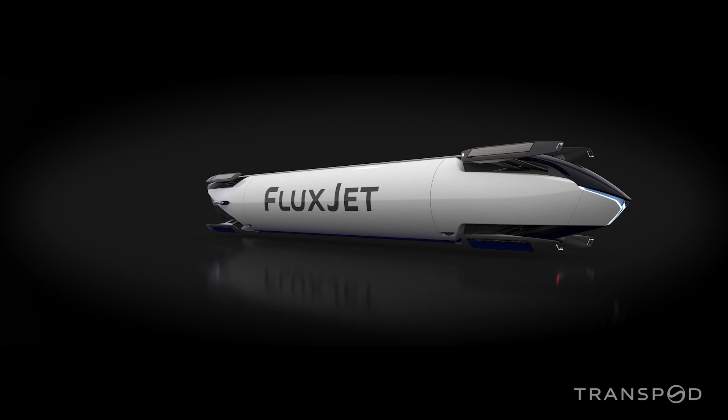The FluxJet is different from an aircraft, and it's different from a train. It's a whole new type of vehicle, a new category. This is a vehicle to carry passengers between cities at over 1,000 kilometers per hour, and cargo and freight. But it operates slightly like a train, and it's built like an aircraft. So here is the basic idea.

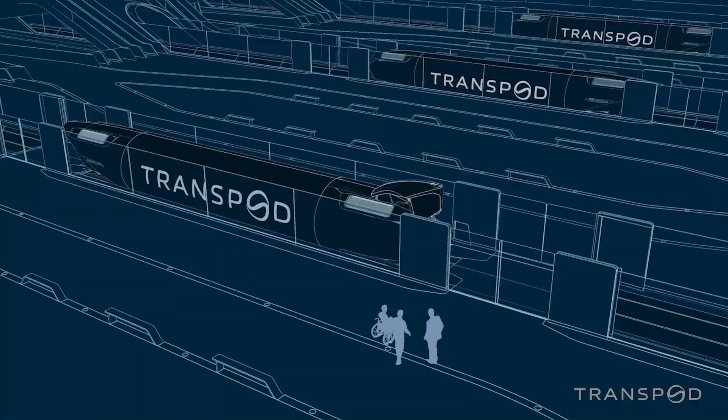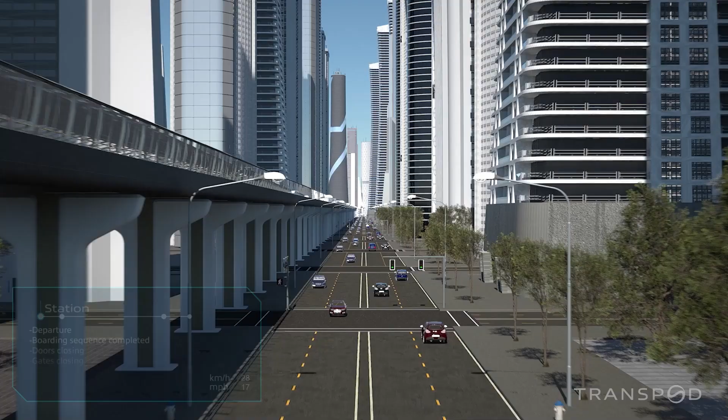This is what we call a FluxJet line. Traveling along this line will be a little bit like going in a subway or a high-speed train, but much faster. I'll talk about the construction plan of that later.

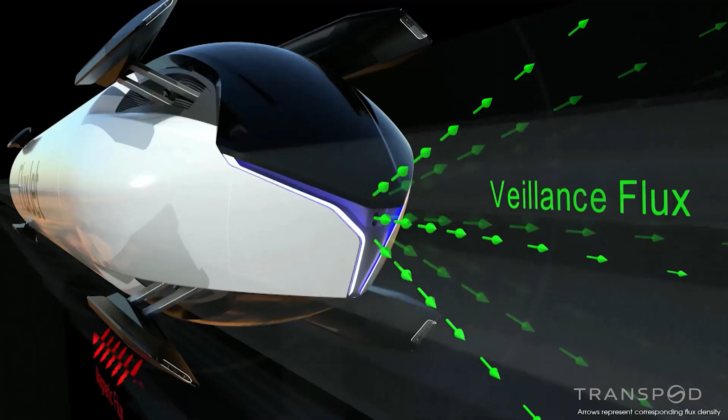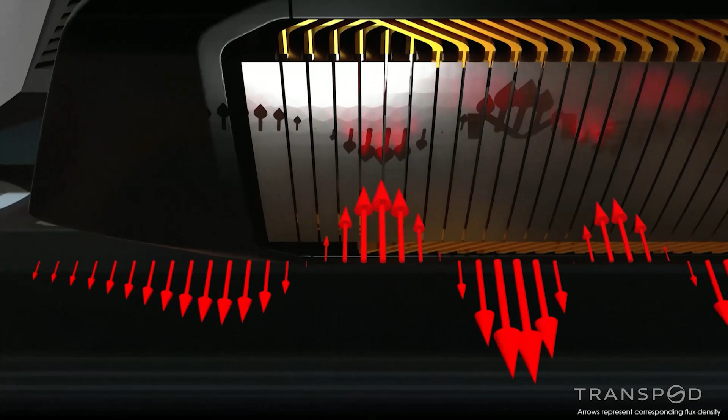But okay, wait, why is it called a FluxJet? Well, we're bringing together three innovations. These are major innovations. We're actually bringing together three different kinds of flux. The first here is called Veillance flux, that's to safely guide this vehicle at high speed. The second is magnetic flux, and that's actually to levitate the FluxJet and push it forward. Now the third flux, in blue, is electric flux, and that's to get power onto the vehicle.

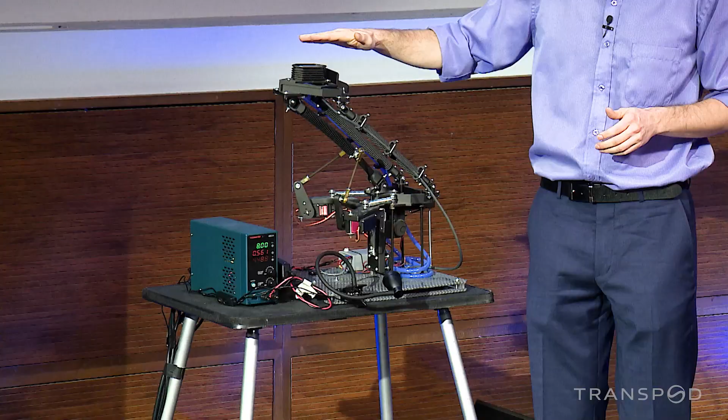All three of those types of flux are with no contact, kind of like this. Because friction is the enemy of speed. And so everything about the FluxJet is designed to avoid friction. So those three things, electric flux, magnetic, and Veillance flux, working together, and that is a first.

Electric, magnetic, Veillance. EMV. The world's first EMV FluxJet. FluxJet for short.

So let's just take a quick tour of those three fluxes, and this is really beautiful. Of the three different fluxes, the first one is electric flux. And what's exciting about that is that we're using plasma to get power onto the vehicle. What the heck is plasma?

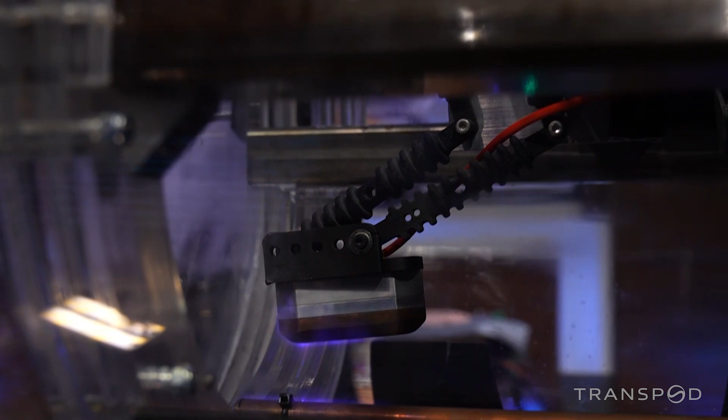So this is just a very small model, and it's chopped up, just a little thing to show you. And they're just dimming the lights. You can actually see plasma here. So right now it's getting power onto the vehicle, see these lights here? And we have the voltage display somewhere. So it's getting power onto the vehicle right now.

The power is coming from the grid onto the vehicle, so it's a circuit. The current goes onto these power rails, goes through that gap, not touching, going through that first bit of plasma there. It's going into the vehicle's systems, powering things up, going out the other side with this other gap of plasma, and then back again. That makes a circuit, but a circuit without wires, at least in those gaps.

So the wires go here, but then the rest of the circuit here is without wires. That is a groundbreaking new innovation for part of this to make it go at high speed. You can actually see that at high speed in real life over here.

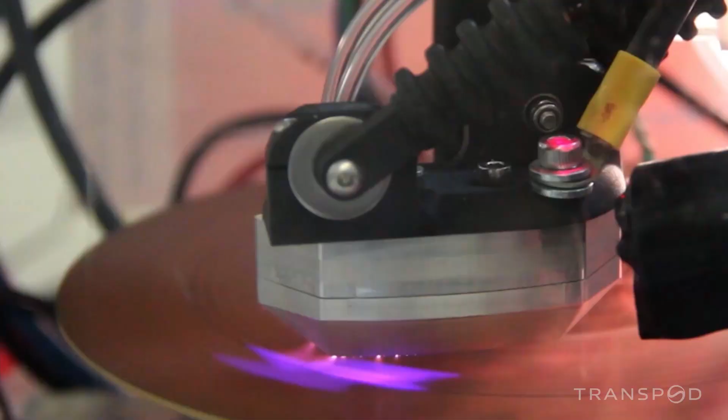This is from actually 4 years ago, one of the high-speed tests we were doing, recreating the conditions of a NASA experimental aircraft, high speed, high voltage. We proved this 4 years ago, and the technology has come a long way since then. We've been working with research labs, and we're just starting another project with CERN, the particle accelerator in Europe, with that whole team. You can actually see that on the FluxJet vehicle too.

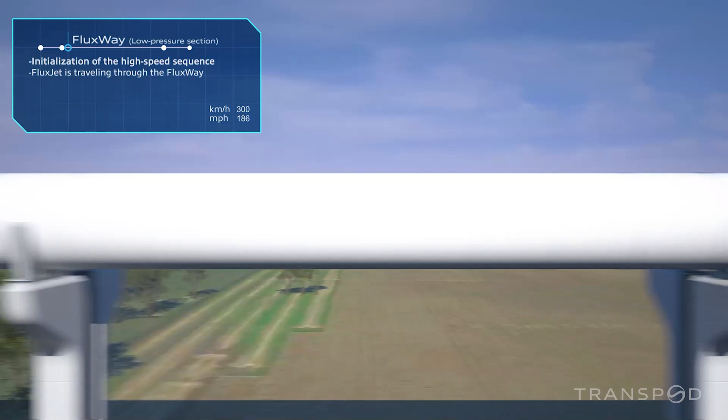Let's take a look. Here's the FluxJet, going along there. It already has auxiliary power, secondary power. Once it gets up to a certain medium speed, you see that special technology deploying, that power pickup, and now we see the plasma there. It's getting power from the grid onto the FluxJet, and now it can start accelerating up to that very high speed. So we're taking forces in nature and we're harnessing them.

Now we have the energy on the vehicle. How do we use that? We're going to use that energy to push the vehicle forward, to propel it forward, and actually levitate it off the bottom, to remove friction. So the second of the fluxes is what it's using, and that is magnetic flux.

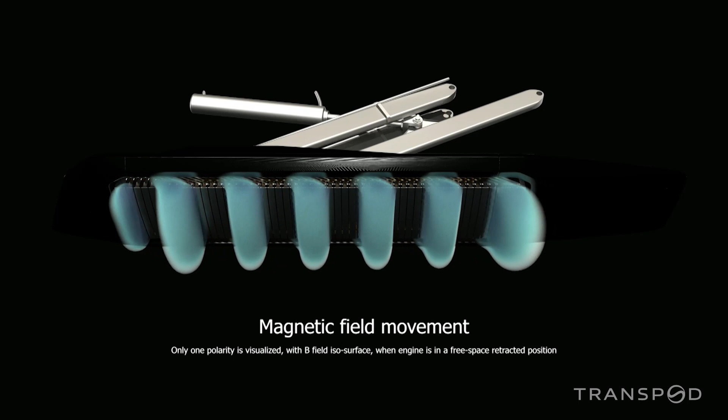Now on the vehicle, the FluxJet, there are some fancy engines. How do they work? Well, they work by creating that wave. They make a wave, and that wave is a tiny magnetic field, just a small wave that's moving along, but at high speed. With that moving wave, it can levitate the vehicle and push it forward. So we're actually controlling and sculpting that wave, and that moves the vehicle.

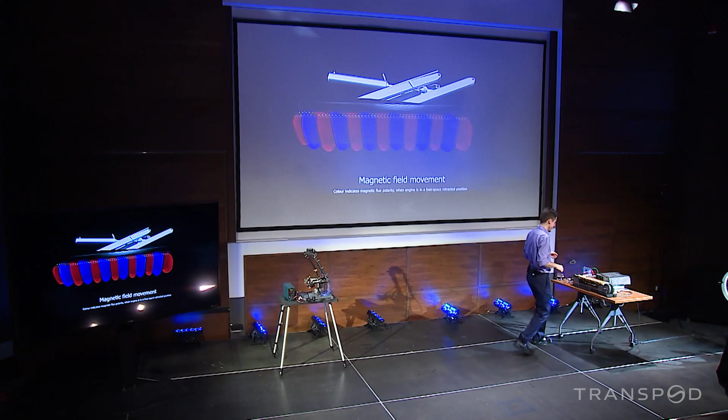You can actually see that over here. This is just a really stripped down, simple version, just to show you the concept. My hand feels nothing, but I can still start to feel this vibrate. Let's try an experiment - I'm going to not push it at all, just drop it like this. Whoa, so it just goes along like that. This is a very crude way of showing it, a very crude, kind of simple toy, very shrunken down version, but that's the basic idea, ultra simplified. That's the magnetic wave.

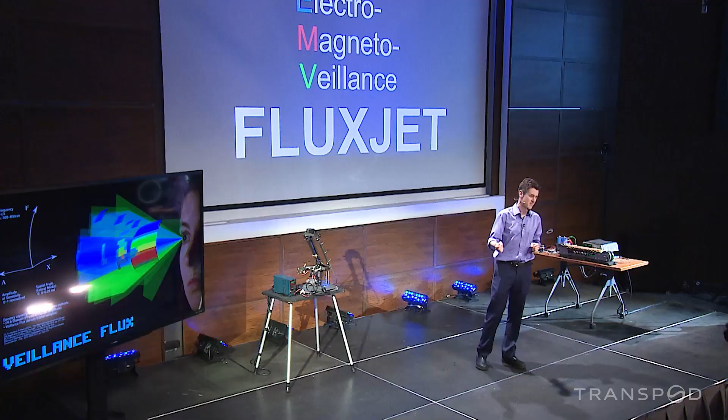Now the third type of flux, getting to the third one, is called veillance flux. So we're just putting these three things together.

Sensing, and seeing, sight. Sensing of sensing itself - it's kind of meta.

We have some secret sauce for the world's first predictive suspension system. Predictive suspension.

Think of your car - in your car, you have a suspension, right? That keeps the car going smoothly while you're driving along, and usually that's a passive suspension. There's this new thing called an active suspension too, but this is the world's first patent on a predictive suspension. That's ultra critical - when you're going at over 1,000 kilometers per hour, that predictive suspension is needed. It's essential, and now we have that.

So to sum up, veillance flux is for safety and for a smooth ride for the passengers. That's the FluxJet - veillance flux, magnetic flux, and electric flux. We've spent the last 5 years developing, researching, and testing this technology, and it all goes to make this new type of vehicle, the FluxJet. Think of green transportation - that's the key here.

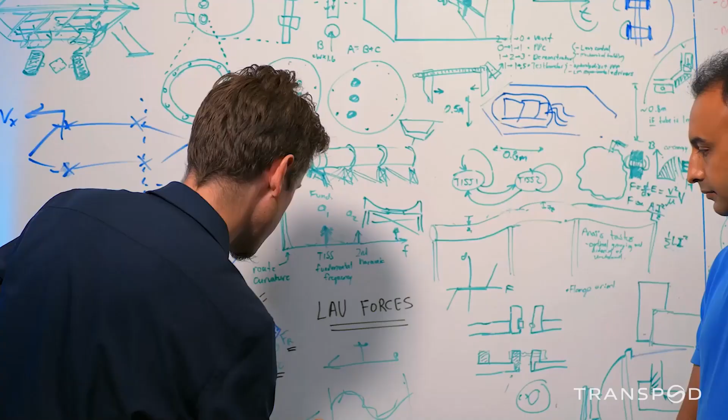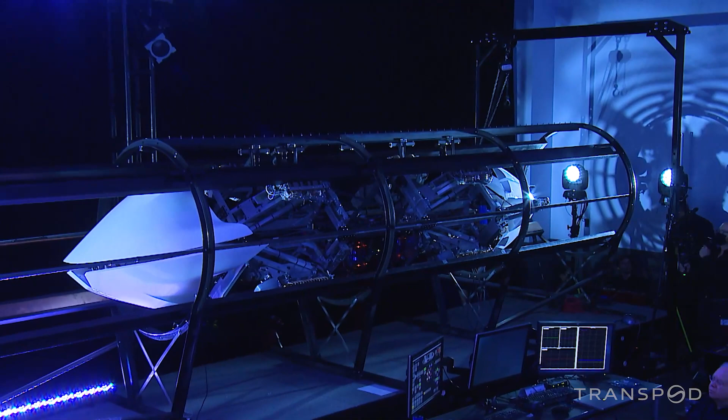So, let's see the FluxJet. Ladies and gentlemen, a baby FluxJet.

This here is about a quarter scale model of the full FluxJet. This thing is an amazing piece of technology. It actually has 8 engines on it, 4 on the top, 4 on the bottom. You see one of them here, one of them here. The 4 on the top are for guidance and levitation. The 4 on the bottom are for propulsion, pushing it along and making that wave motion.

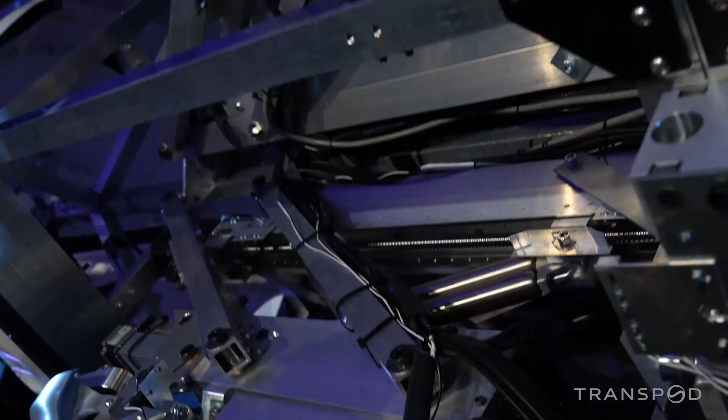All of those engines are extending out, robotically kept in place like that, held in place kind of like this, all interacting with the guideway, which keeps the vehicle under control. It can actually roll and bank into a curve, like when you're flying on a jet and they bank the aircraft. They all work a little bit like an octopus—think of it like an octopus with 8 tentacles, all of those engines working together.

This thing actually has 11 computers right now, 11 brains working together. 8 of those brains are for the 8 engines, and you can take each of those engines—they can work together or independently. It's very real-time, high-speed control. Of the 11 brains, 2 more are for communication and guidance, and then there's 1 brain to command and control all of the other brains—1 brain to rule them all.

This has a liquid circulatory system going through it, like liquid coursing through the veins in your body, cooling the different systems.

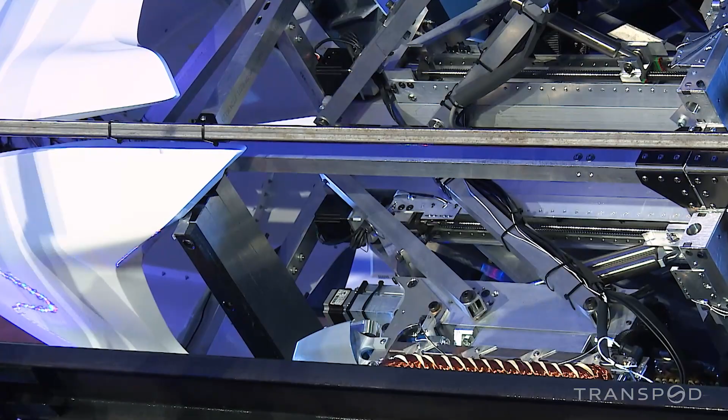Now, this one demonstrator—we were running this at a different site, and we basically picked the whole thing up and plunked it down here just so you can actually see and come up and touch it. This is a very rare opportunity to do it while it's out of service. They often talk about the yellow line, stand back from the yellow line—so today, there is no yellow line. We've stripped things away so you can actually walk up to this and touch it after.

Right now, it's operating for safety, in levitation-only mode. So let's try the levitation-only mode and get that started. What's happening here is it actually has magnetic gaps. So what I'm going to do—there we go. I'm actually going to get up here so you can see. Now let's just look at those gaps. I can stick this piece of paper in here, and let's just get that there. There we go, okay, so there's a gap there—no contact. It's controlling in real time and lifting this 1 ton of weight.

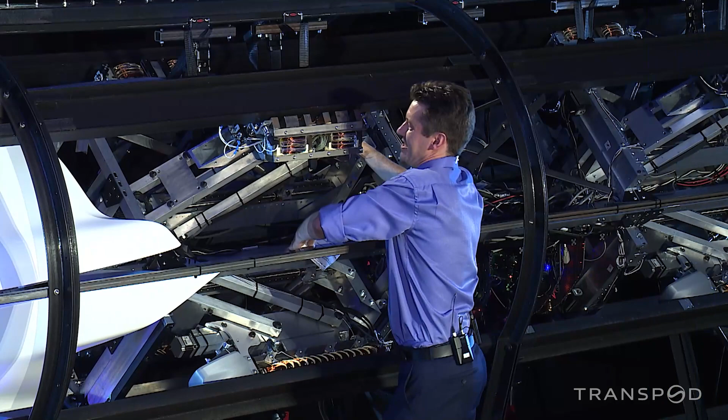The whole thing weighs 1 ton. It's like lifting up your car on a very smooth cushion of magnetic waves. You see how it's stabilizing itself. At high speed, we need that stabilization, all working in real time to just guide it smoothly.

Let's also see the computer vision. So right now, if they can bring that up on the screen. Oh yeah, there we go.

Okay, so if I wave this, it's covered in sensors all over. I'm just waving hello at the front of there. Okay, this is the front, that's the back. So this is just one of the sensors.

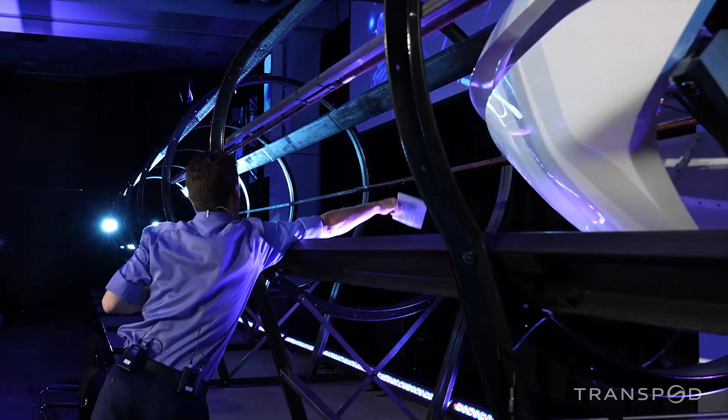See all the computer vision, so it's tracking the guideway in real time. And the whole thing is covered in sensors, so at last count it was about 230 sensors just on this thing.

Compare that to the full FluxJet vehicle. It's incredible the amount of control and communication that's going on.

Speaking of that, I sometimes talk about it like a set of Russian dolls. So you have the small one, and right now we're also working on a half-scale test facility that we've got the construction permit for in France. That's going to be next year. Meanwhile, we're working on the full-scale test track, which you'll hear about in a moment, in Alberta, Canada. So all of this is being developed by us and our partners at the same time.

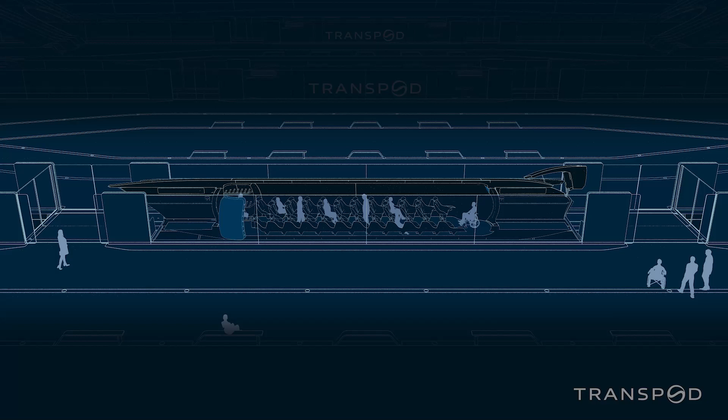So, okay, what about the passengers? When Boeing and Airbus build a new jet, they always design it to be reconfigurable, so every different airline has their own preference for how the seats are laid out. They all make their different forms. And so that one's old.

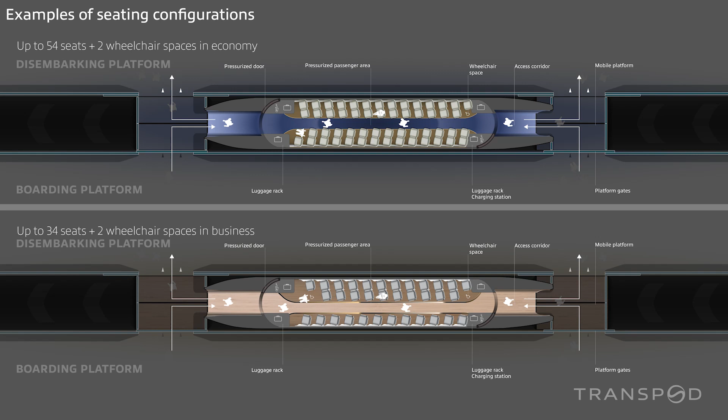A little bit newer is two of our versions, where we have the economy version and the business class version, different versions of the interior. The economy class version has 54 seats and the business class 34 seats.

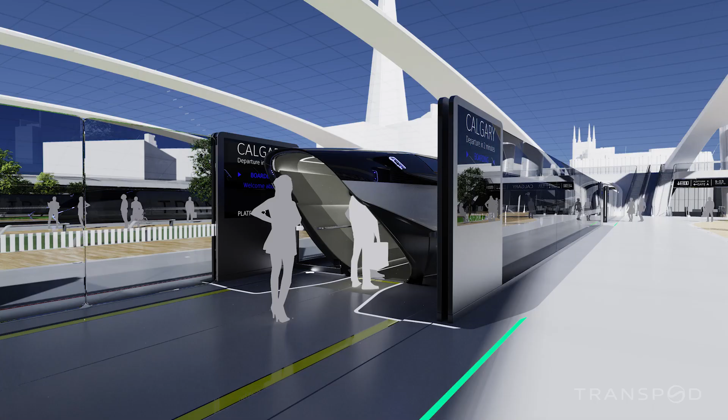One of the amazing things here is we have a special design to make this fully accessible. So this is a fully accessible vehicle, the FluxJet. Think of people who are in a wheelchair. With this fully accessible vehicle, that's part of the passenger experience that we've been designing.

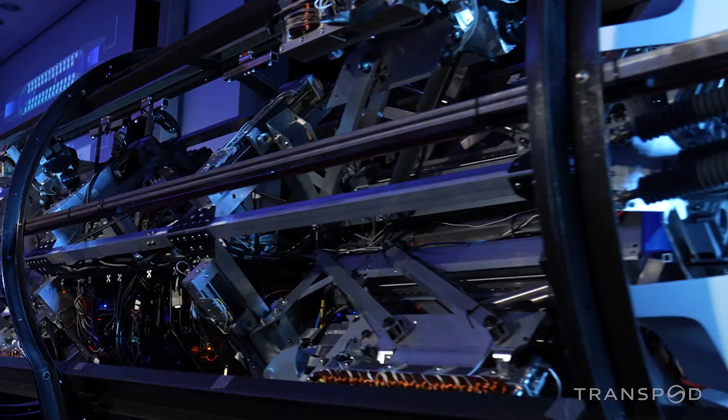So that's a first. The whole line is called a FluxJet line, and it's not only the vehicle, but also the infrastructure. We've been working with construction partners and civil engineering firms, architecture on all this, the infrastructure design, station design. This is being designed for different countries, different cities around the world.

I'm going to give just one example of a location, and that is in Alberta, Canada. That's the test track, the second test track for the full regulation I mentioned, where we're going to have regulators from Europe coming, which we're already working with, to inspect that line for the final certification, and of course Canada and the US. That's going to be in Alberta, so let's see some of what's coming up in Alberta.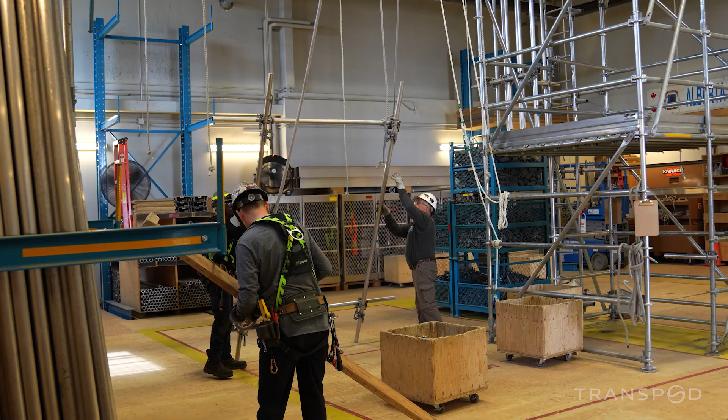The FluxJet is an exciting, major project that will put a global spotlight on Canada and Alberta. My name's Terry Parker. As the Executive Director of the Building Trades of Alberta, we represent more than 60,000 skilled trades professionals in pipe fitting, welding, carpentry, ironwork, electrical, and much more. The FluxJet is a bold innovation.

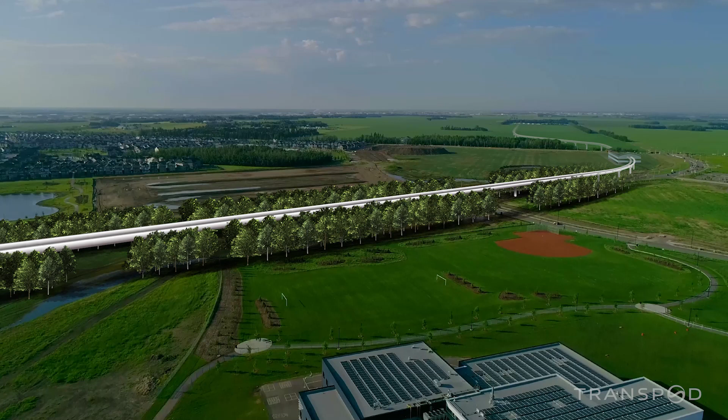I'm Mustafa Shaheen, Edmonton Global's Executive Vice President. Alberta contributes $330 billion to the economy of North America, and Edmonton is Canada's fastest growing region. As Western Canada's manufacturing and logistics hub, we are strategically connected for international trade. We look forward to participating in new industries and bold new projects that revolutionize transportation as we know it, to help us reach our net zero goals by 2050.

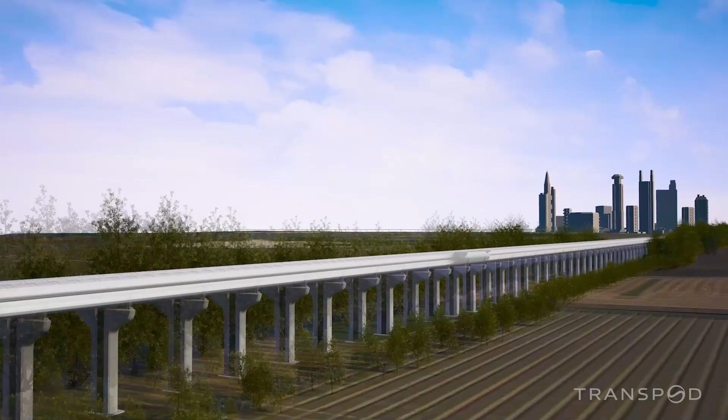The TransPod FluxJet line is that project. Our workers handle billions in construction work each year, and the TransPod line is ideal for construction at a mass scale. The TransPod FluxJet line is an exciting project that will enhance regional connections and accelerate transportation at a massive scale. The FluxJet is a bold leap forward in technology that we're incredibly excited about and to be part of.

Now, you may have heard the news about the infrastructure investment that we announced back in March. That is just the first step. The total Alberta project is $18 billion, to construct the full-scale line from Calgary to Edmonton. And I can now announce that that project is going to be a FluxJet line.

The first phase is construction of a short section, about 15 kilometers, to serve the Edmonton airport, and also to act as a test facility and test track for high speed and for regulation and certification. The final phase is to construct the full 300 kilometers between Calgary and Edmonton, with station stops in between.

And that location is just one example. We have projects planned in other countries with government leaders in the USA, France, Italy, and the UAE. You'll be hearing more about those soon. But let's think about what it's like for you.

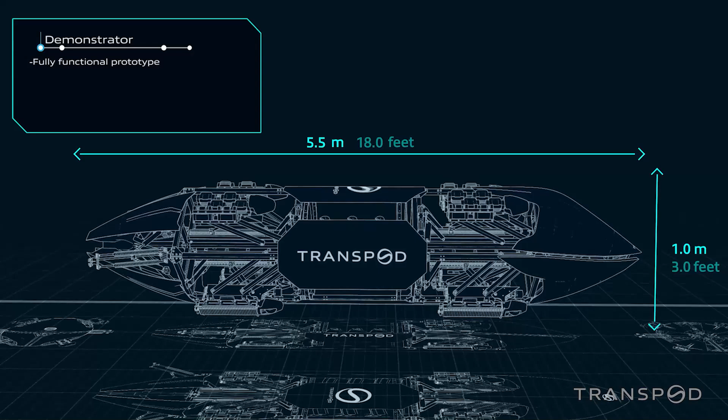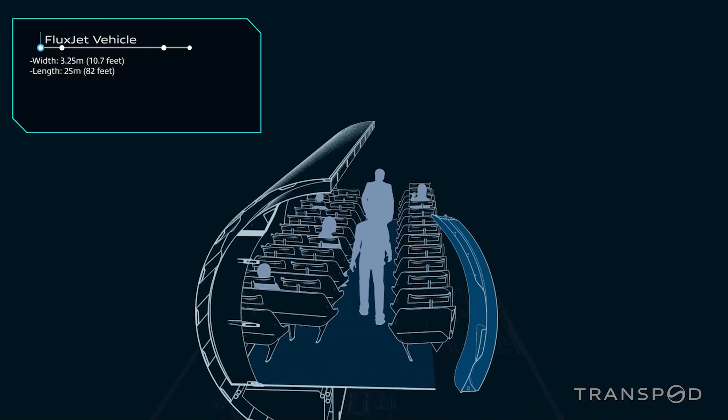So we see here the scale of that small demonstrator, but then this is the full FluxJet vehicle that we're designing right now in parallel. It's about the length of a train coach, actually, and it's like an aircraft.

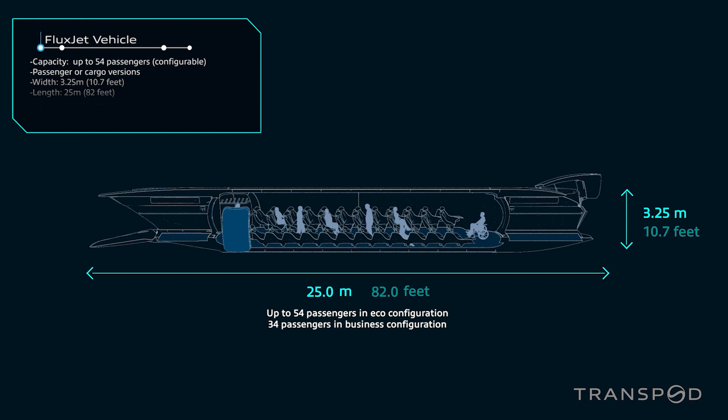And so here are some of the blueprints at a station. Let's just see.

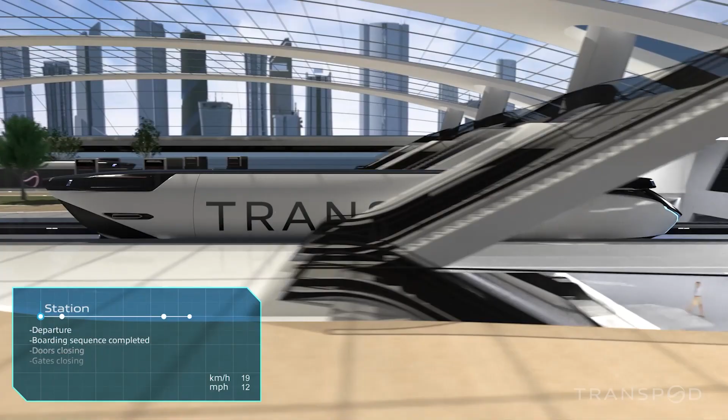Now, at a station, think of when you fly in a jet. You have to book your ticket for that exact day and time. You can't just show up at the airport whenever you want. With the FluxJet, you just show up at the station, kind of like a subway, whenever you want, pay for your ticket, and wait for the next vehicle.

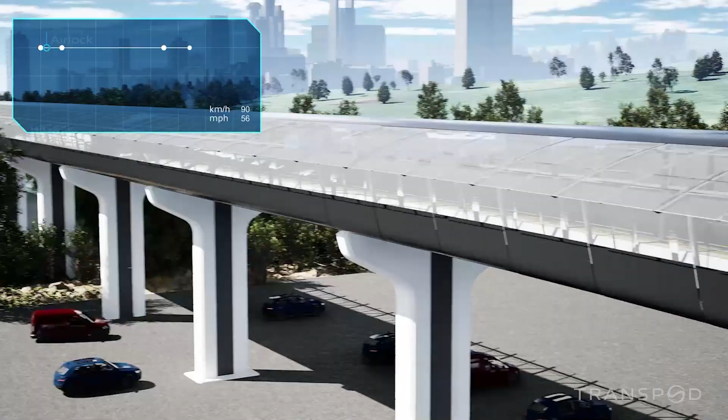One special thing about this is it's 2 parts. The first part is for local transportation in a city, to relieve mass traffic congestion. So it's a public transportation system, with a station downtown, other stations around the city towards suburbs and airports, and so on. That's for local and regional transportation, at a moderate speed.

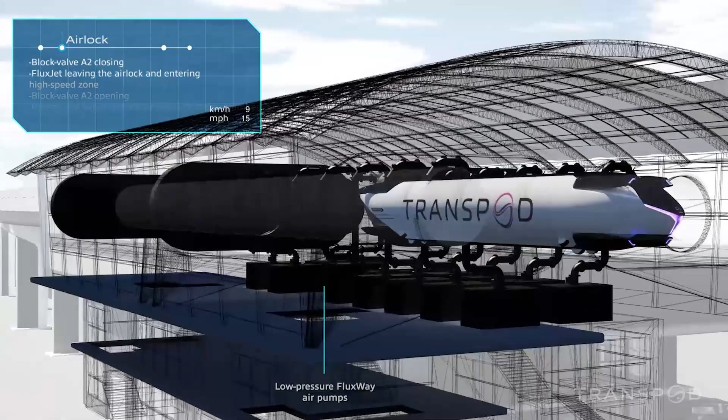Now, when we get to the edge of the city, you see it go into this little building here. That's to transition it to get ready to go into the high-speed zone onward to the next city. And so it's ready, and now it's going to start accelerating gradually up to its full speed.

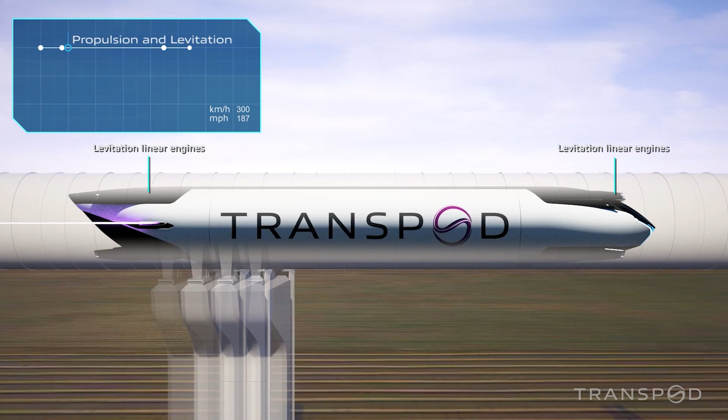Okay, so here we see it beginning to get up to speed, just beginning. And what do we see? We see that special plasma technology where we're controlling the plasma, monitoring it, cooling it, and so on. There's a lot going on to really maintain and harness that force of nature to get power onto the vehicle. And now we have primary power to the vehicle instead of secondary.

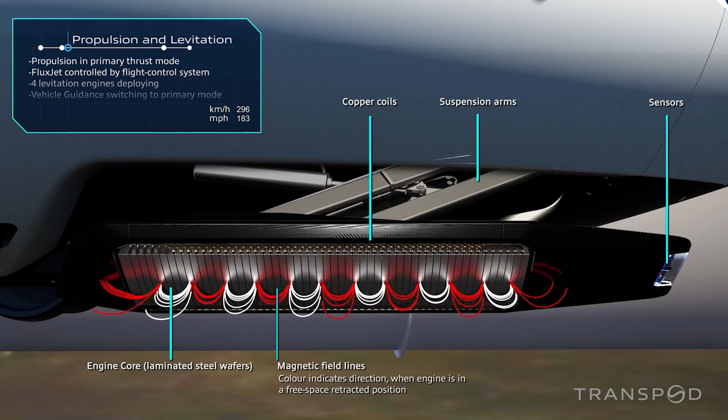Okay, so now we're switching to primary mode. We see those engines extending. Now we see those waves, those magnetic flux waves going along there, and that levitates and pushes the vehicle.

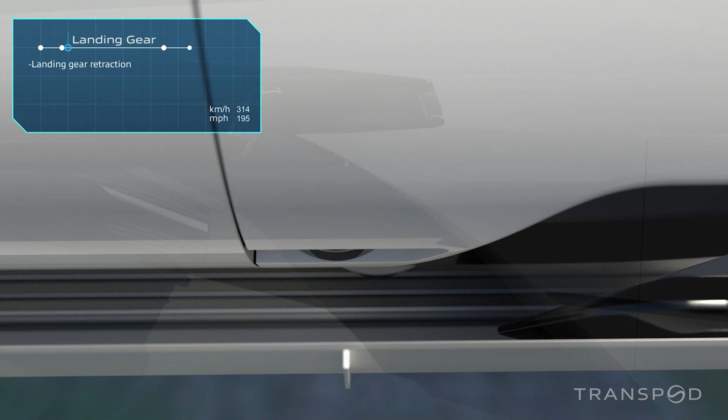We sculpt those waves, and now all of these control systems, all those sensors I was talking about, veillance flux and so on, you see the extra landing gear retracting. Okay, now it's just about ready to start accelerating to full speed. And the veillance flux, this is more than just sensing, it's sensing of sensing - we'll get to that. But it's all of these systems working together, that's what we're working on with all of these partners.

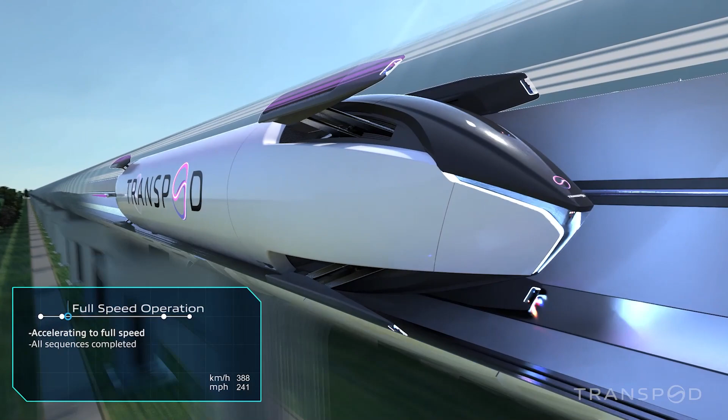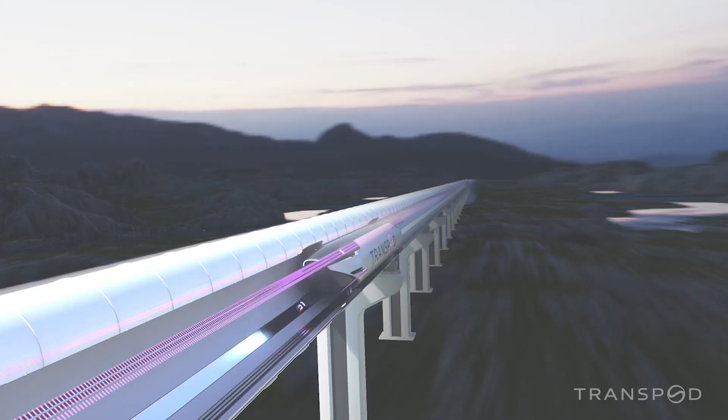As a passenger, when you get to full speed, you're coasting there. You just coast along, read a book, and then you start to decelerate as you get close to the next city.

Working with all the ecology and constructability, it's a huge project, both on the construction side and also the vehicle development side. It's a major undertaking that we are doing with industrial partners around the world and research institutes and universities around the world, bringing all of those areas of expertise together right now. As we speak, it's all coming together to make this FluxJet.